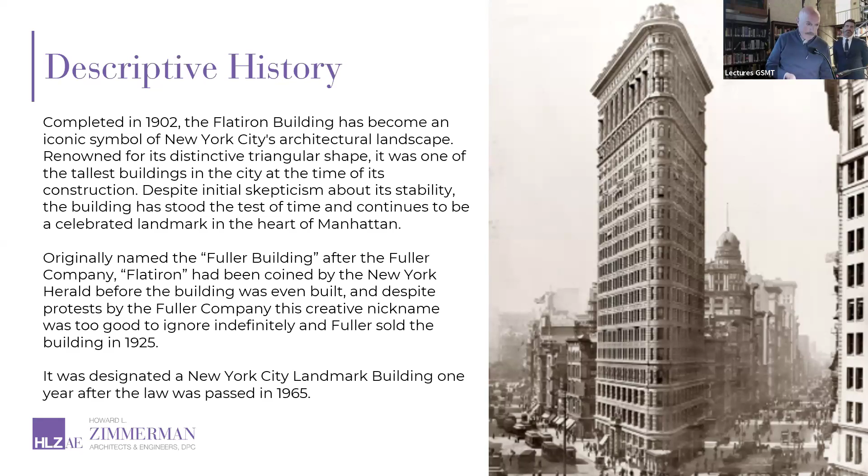The address is 175 Fifth Avenue. It stands between 22nd and 23rd Street. The architect was Daniel Burnham.

Daniel Burnham was a New York architect who designed the Flatiron Building, and then for whatever reason moved to Chicago and became more renowned for the Chicago school style of architecture.

The building has 21 stories plus a penthouse, and there are 467 total linear feet of street facades on all sides.

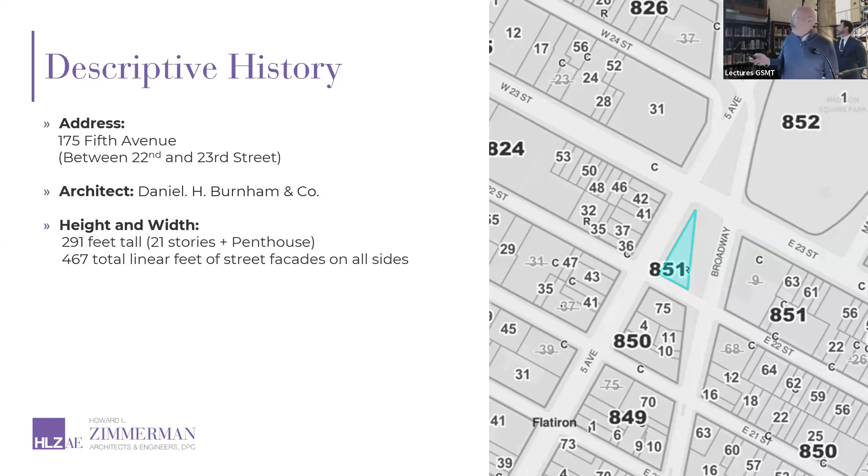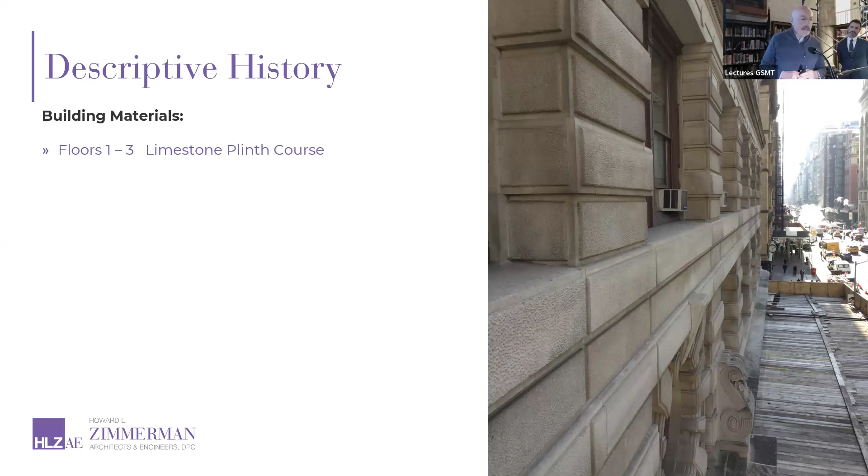So there are lots of building materials in the building. The first 3 floors are limestone plinth courses.

Whoops, sorry, I keep mixing up the advance and the pointer, so I apologize.

So the first 3 floors are limestone plinth. Floors 4 through 16 have terracotta ornamentation.

You just see all this marvelous terracotta around here. There's brick, terracotta, plinths and lintels, all stonework, decorative stonework that Alexei will get into in a few slides.

Floors 4 through 16 are terracotta ornamentation in the form of window lintel sills, jambs, plus spandrel medallions, keystone water tables, plus brick masonry.

I don't think the brick really reads when you see it. It mostly looks like a stone building, but there is a tremendous amount of brick on the building.

Just a magnificent building. There's a vantage point that you don't really get to see up close, and we'll have more slides, but the ornamentation and the detail and the arches are really spectacular.

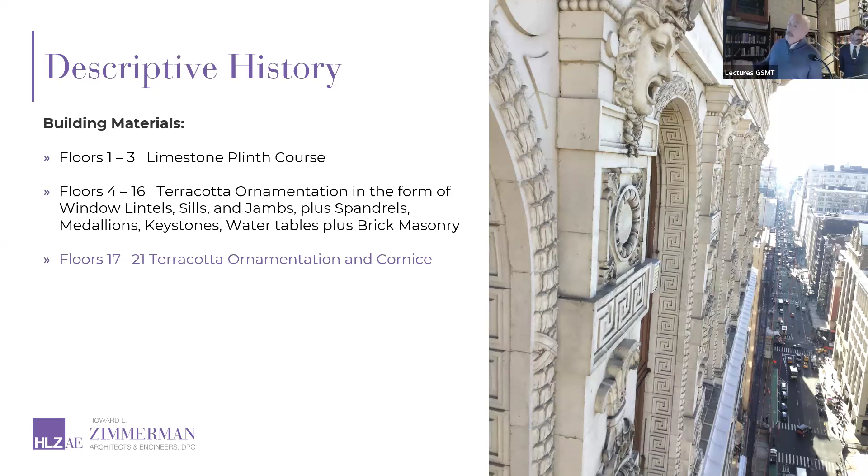On floors 17 through 21, there's terracotta ornamentation and cornice.

Most of you know, but terracotta, which I'll explain later—all of you who have gone to camp or arts and crafts classes and made a clay pot, that's basically terracotta, except this has a glaze on it. It is a very fragile material.

It was cheap at the time to recreate ornamentation, which was very popular back in the day.

As a building material, I don't know how to say this delicately, it should only have a life cycle of about 20, 30, 40 years in a freeze-thaw environment.

Not that it's going to fail or should fail—it is in failure. Architects and engineers have to prove to the building department that it's not in failure to keep it. Otherwise, it has to be replaced.

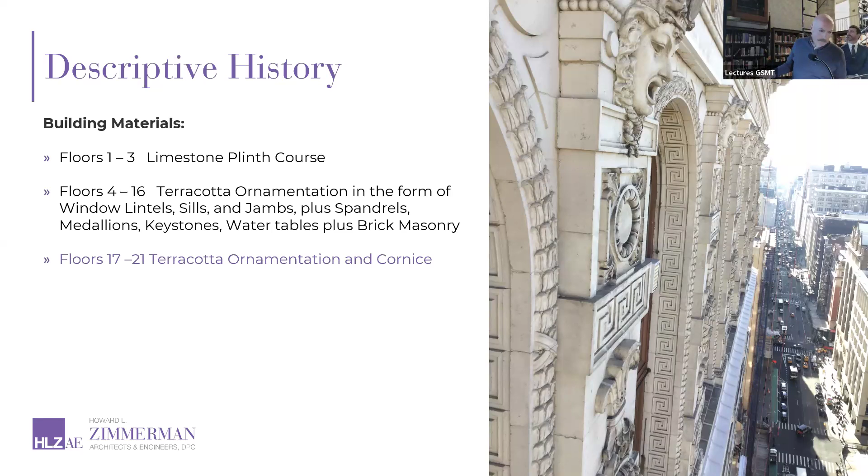So this is a beautiful photograph that you don't get to see. We actually went to the roof of a building across the street to see this.

Again here on the first floors are the limestone plinths, then you have floors 4 through 16 with terracotta ornamentation.

17 through this area here is terracotta ornamentation and a cornice. On floor 22, there's GFRC and brick pier balustrades and a stucco penthouse, and aluminum frame double hung windows throughout.

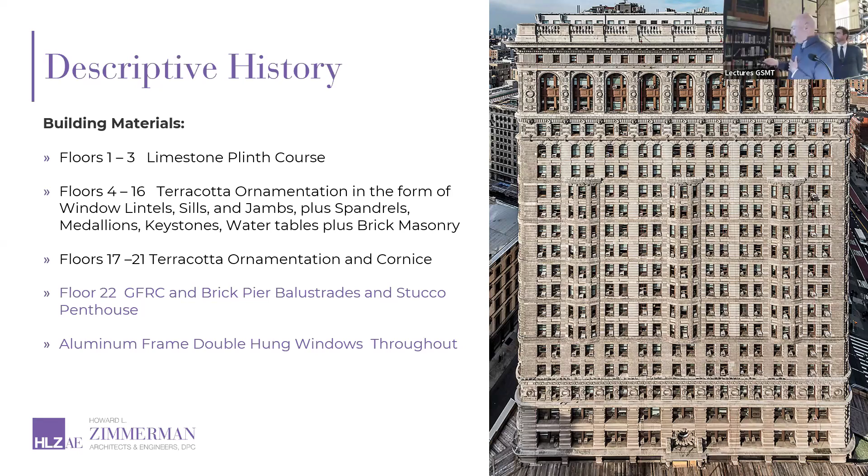We dug this up, and when I first saw it, I thought we were back in Europe or something, but Alexei told me this did exist for a brief time. The Landmark Preservation Commission finds that the Flatiron Building was designated a landmark in 1966.

Also, I wanted to mention, although it's iconic and very New York and international, there was Edward Steichen's photograph in 1918 or 19.

He photographed it for the New Yorkers from Madison Square Park, looking that way through the trees.

I think it was raining or snowing, and it was colorized, but this was 1909 or 1919. And it gave the Flatiron Building a global iconic audience at that time.

So the Landmark Preservation Commission in 1966 found that the Flatiron Building had a special character, special historic and aesthetic interest and value as part of the development, heritage, and cultural characteristics of New York City.

The Commission further found that among the important qualities, the Flatiron Building is an interesting example of the early steel-framed skyscraper built on an unusual triangular site that, due to the prow-like effect of its northern end, creates an impression of great slenderness and height, that it displays a wealth of ornamentation detail representative of its time, and that although a utilitarian office building, it has inspired literary outpourings of an almost poetic quality.

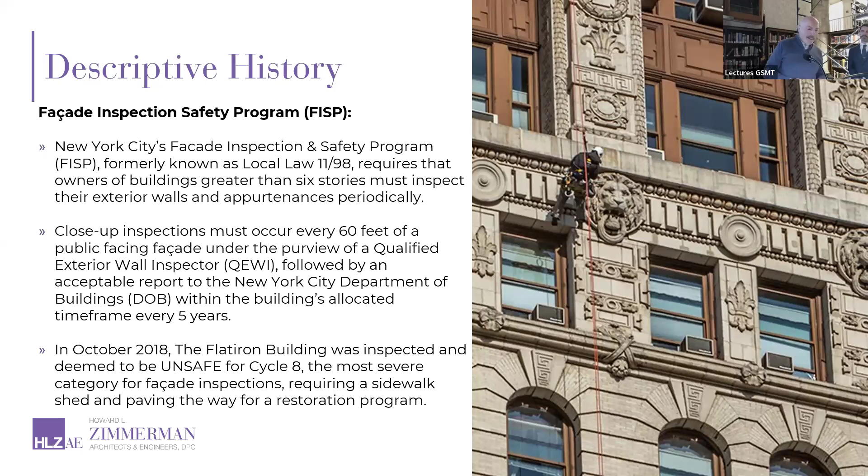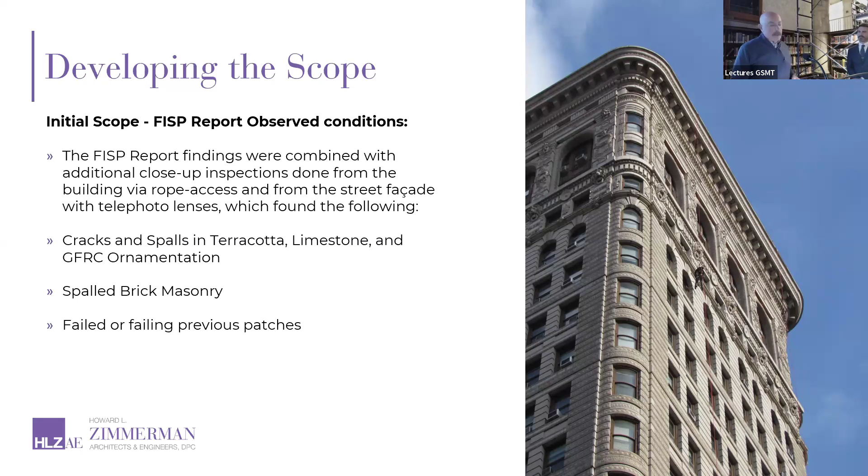So now that we had all this information from rappelling down and putting together a scope of work, it was quite an undertaking. The FISP report findings were combined with additional close-up inspections done from the building via rope access and from street level with a telephoto lens, which found cracks and spalls in terracotta, limestone, and GFRC ornamentation, spalled brick masonry, and failed or failing previous patchwork done in previous cycles, which we will show you all of that.

Understanding the material is always very important, knowing your patient is very important. Borrowed from Italian terra, meaning earth, and cotta, meaning baked, terracotta was utilized for construction by ancient Greeks, Egyptians, Romans, Chinese in the Indus Valley, and Native American cultures. Modern usage for facade cladding came into fashion in the late 19th century as a reaction to the 1871 Chicago fire, which spurred great interest in fireproofing materials.

From 1870 to the 1930s, prominent architects, including Daniel Burnham, appreciated the characteristics of terracotta as it was lightweight, moldable, mass-produced, and had the ability to mimic costlier natural stone details from hand-carved limestone, marble, or granite.

So the understanding is, back in the old day, they used to use wood for ornamentation. That got replaced when metal tools and the ability to carve stone came into effect. Stone was used, but that became more costly over time, and they came up with the idea of using terracotta as a cheaper way of recreating beautiful details in a more cost-effective manner. Although they say it's lightweight, if you try to lift one of these things, it's not so light.

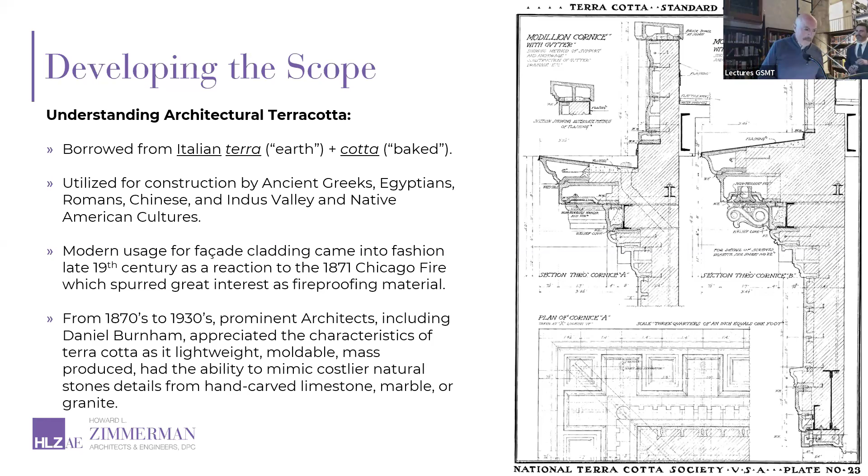Understanding the material is very important in our business. Terracotta itself is typically not the actual cause of the problem. You could leave terracotta by itself for years and it'll be perfectly okay. As with any material, once you introduce another material to help, support, anchor, or complement it, two dissimilar materials always create problems. Steel was used as a means of holding it together and supporting it, and it rots and rusts and puts stress and strain on adjacent materials.

Instead, the iron or steel support structure hidden behind and within the units has deteriorated due to decades of water infiltration from masonry joints and deferred maintenance. As iron or steel rusts, the members concurrently expand and weaken, causing a variety of pressure and loads on the softer terracotta immediately adjacent. Steel has a phenomenal ability.

When steel rusts, it expands, like slate does also, and in its expansion it exerts tremendous pressure that is more powerful than the ability of the stone material to withstand, and that's what causes the failure. The steel is actually pushing on the stone, and it just overcomes it. That phenomenon is called rust jacking.

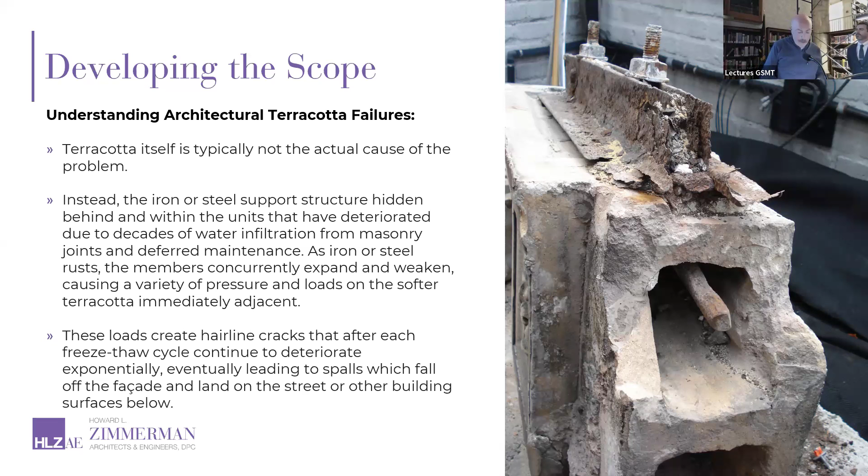So classic deterioration here, you have cracks - hairline cracks. The idea is that this triangular piece will eventually dislodge and slide off this ledge, as these will, and those are deemed hazardous conditions. Here are previous patches or sealants that have given way and are in failure.

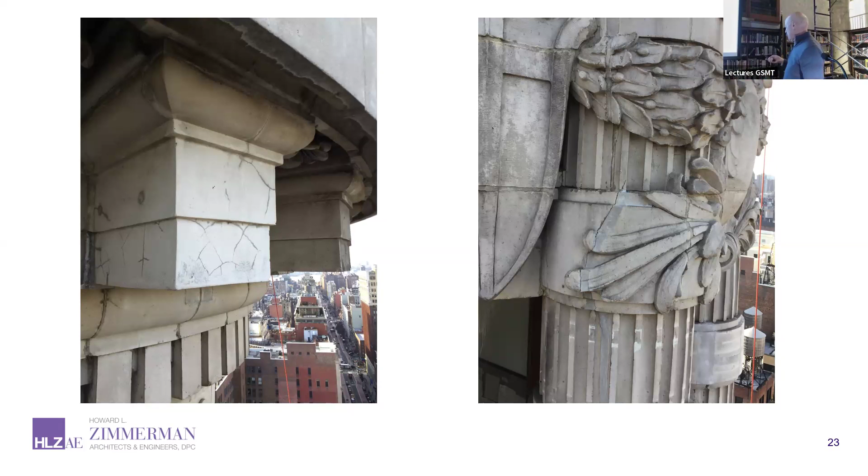See all this crack - all of these are conduits for water to come in and penetrate slightly one year, penetrate further the next year, and over the course of 5 or 10 years it really gets in, penetrates the surface into the steel below. Here are previous patches that are failing. These are previous patches that are failing.

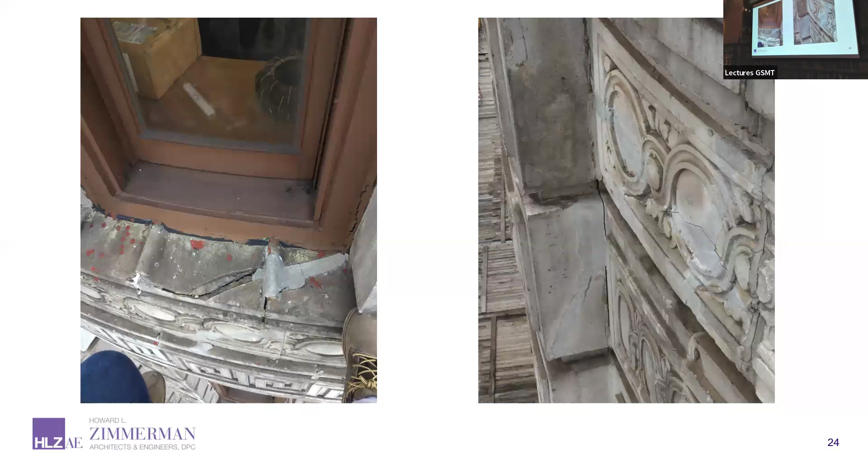So, you know, these are really unsafe conditions. I don't think you need to be an architect or an engineer to figure out that this thing one day is just going to fall off in a freeze-thaw cycle.

Here's what happens: water penetrates through these mortar joints, which are porous. Even if the brick is glazed or more waterproof than not, the mortar joints are porous and serve as a conduit for moisture to get in. The moisture gets in, freeze-thaw, it freezes, expands, and pops the surfaces of the brickwork.

That's why the popular white glazed brick of the late 50s, early 60s - I always say some dumb architect thought about the idea of self-cleaning buildings, but I don't know if that's a true story. Anyway, they came up with this glazed brick, which looked pretty and held its cleanliness a long time. But again, water got behind the glaze after 20 or 30 years, weakened everything, freezes, and the glaze pops off, and all of a sudden you're getting shards of white glaze surface falling to the ground which can be very injurious. We have seen many setbacks and backyards where the entire backyard is covered in these shards, and thank God it's not on the street.

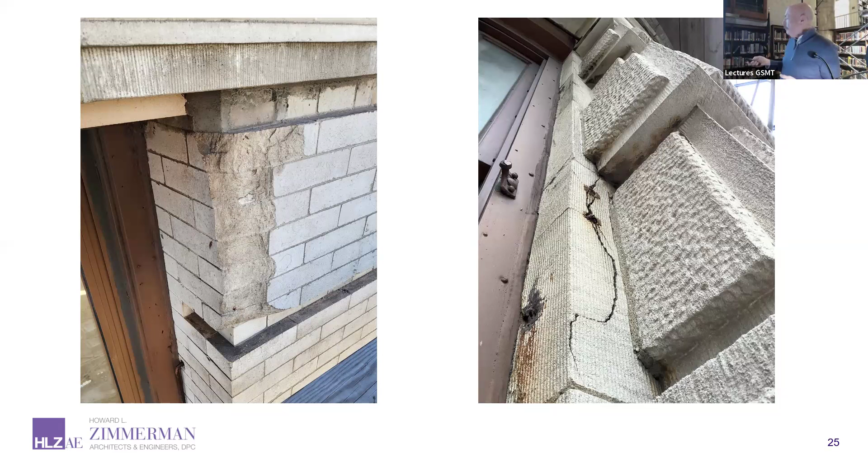So here you could see, again, previous patchwork, cracks. Again, the idea from the building department is that this triangular piece, one day when it just loses all its adhesion, will fall off and slide down and become a projectile.

This is a previous patch. I don't know what they were thinking or what they did, but my grandson in arts and crafts does a better job than that.

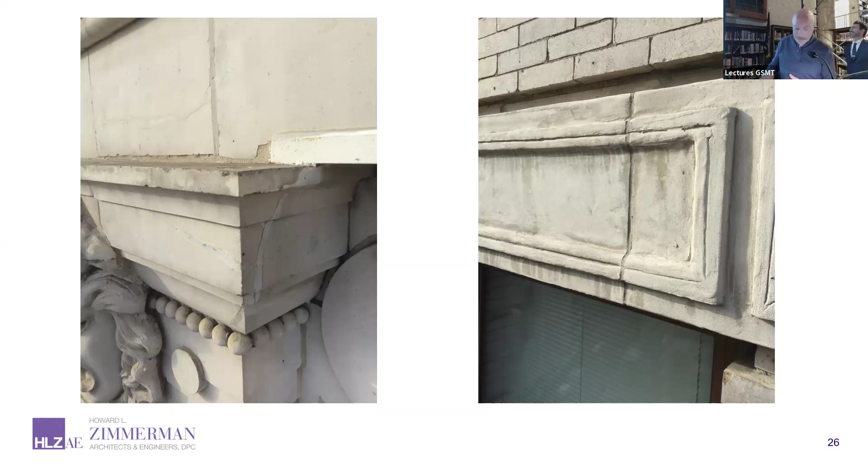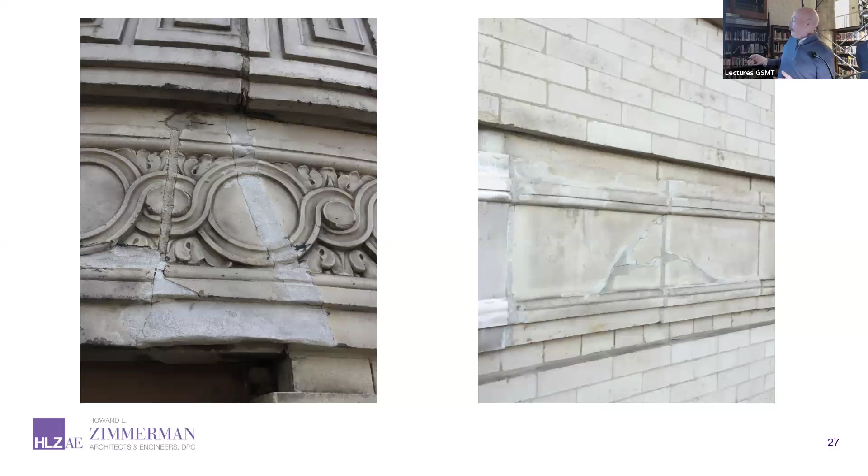This is to show you how frail this joint was caulked. This is a caulking joint that theoretically is to hold out the water, but I guess it was put too late in because water had already penetrated, and this piece is going to fall off. Forgot whose foot this is, but here are previous patches, and you can see the openness when you think about water penetrating and causing damage.

All of these joints, and there are hundreds of thousands of linear feet of joints, are all open conduits to any building, let alone a historic and fragile building, to allow water to get in to deteriorate the anchorage and the steel.

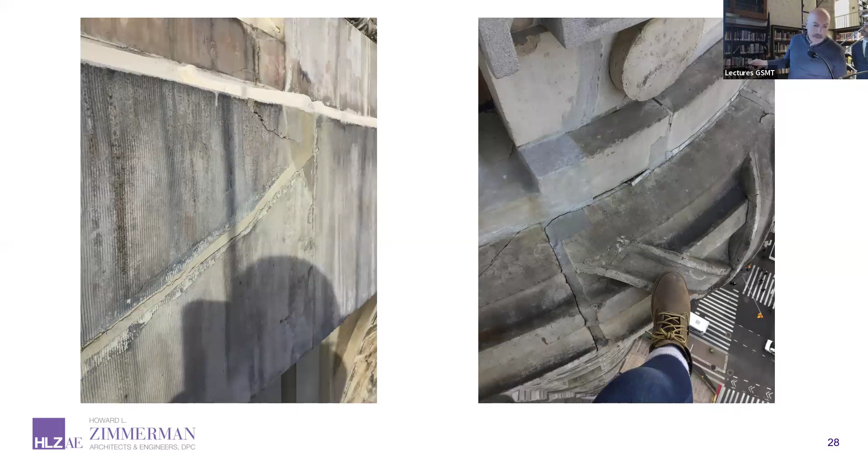So after we diagnosed all the conditions that I just showed you, did probes, construction documents had to be created. We did the inspections, completed them in 2019. Work then began on the construction documents, setting forth the details and requirements for the project, including specifications and construction drawings that established the quality level of materials.

Quantitatively, qualitatively, and systems required for the project. There were 134 pages, including 50 line items in the bid breakdown, no scope for windows or storefronts. As a sidebar, we produced 134 pages. A couple of months ago I had the wonderful opportunity to go to the TWA Hotel at JFK, and they have an exhibit there. That whole building, they say in the display, was done in 60 drawings, no AutoCAD, no computers, and we have 134 drawings here.

Upon completion of the CDs, the project was filed with LPC and DOB and competitively bid out in the spring of 2019, ultimately being awarded to AWR Group. Here is a sample of some of, this is just a minuscule snapshot of one of many, many drawings that were necessary to figure out all these details, how things go together. It's really a jigsaw puzzle that had to be deconstructed and figured out, and Alexei Tajzler was the person who figured it out.

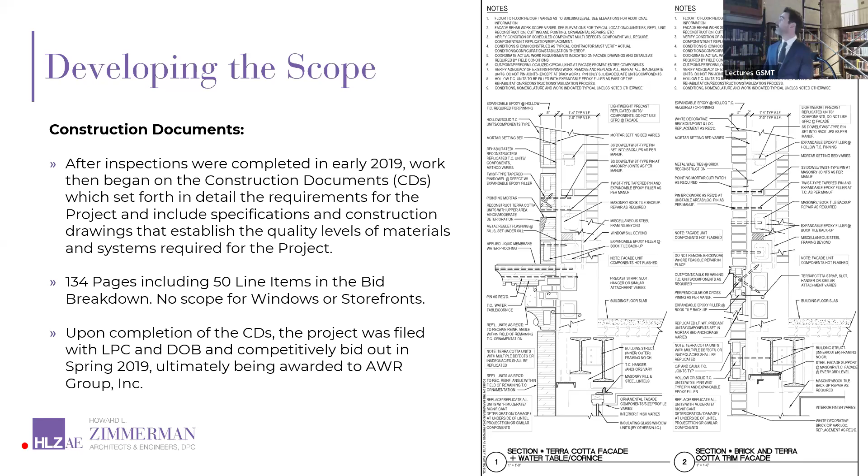Hello, everybody, and thank you to the General Society for inviting us here today. My name is Alexei Tajzler. I am an architect, I'm a director. I worked for Howard for over 15 years. And while the Flatiron Building is not the oldest structure I've had the great privilege to help restore, it's certainly the most famous. So we can get on to implementing the scope and mobilization.

So we had the CDs, we had the bids, the permits, AWR was ready to go. What does that entail exactly? So first thing was the installation of a full height pipe scaffolding plus additional suspended scaffolding. You can see a great photograph of the pipe scaffolding, not unlike what we're sitting underneath right now. We then divided the building into a grid of individually focused areas, which I'll get to in the next slide. There was coordination of 15 employees at HLZAE across all levels and specialties, including architectural, structural, and special inspections.

With the pipe scaffolding and the suspended scaffolding, we now could fully inspect the entire facade up close. So we found further areas that weren't visible from the rope access or from the street inspections. And then we developed a field office on site with AWR Group and Gladding, McBean, who is a terracotta vendor.

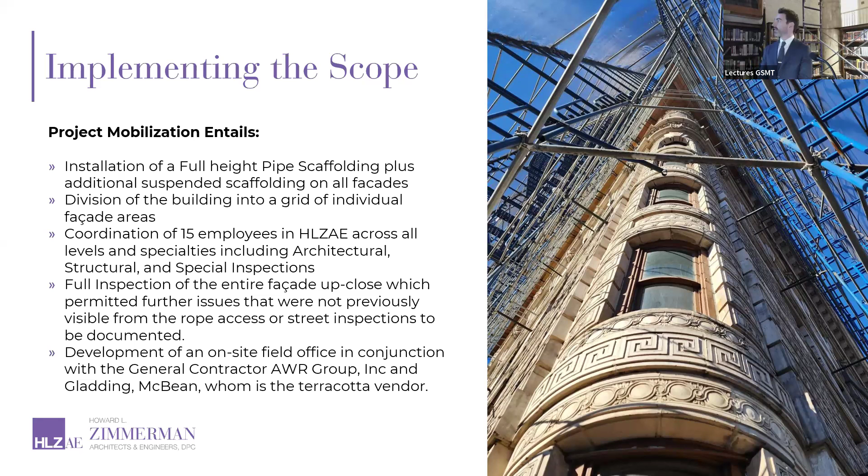So the grid. We took each facade and overlaid a grid of 400 individual areas, about 12 by 30 feet. What that allowed us to do was walk the building and then individually focus on those spots, tag them with work categories that were geo-tracked, work categories such as crack repair, unit replacement, et cetera. All told, we're looking at 7,155 tags to be called out, which included nearly 2,000 ceramic terracotta units to be replaced.

20,000 linear feet of masonry joints to be repointed. As Howard mentioned, that is the conduit to get water into the backup, and 1,000 linear feet of crack repair. You can see here, all the grid, we have about 22 rows and 6 or 1 column, depending on the facade.

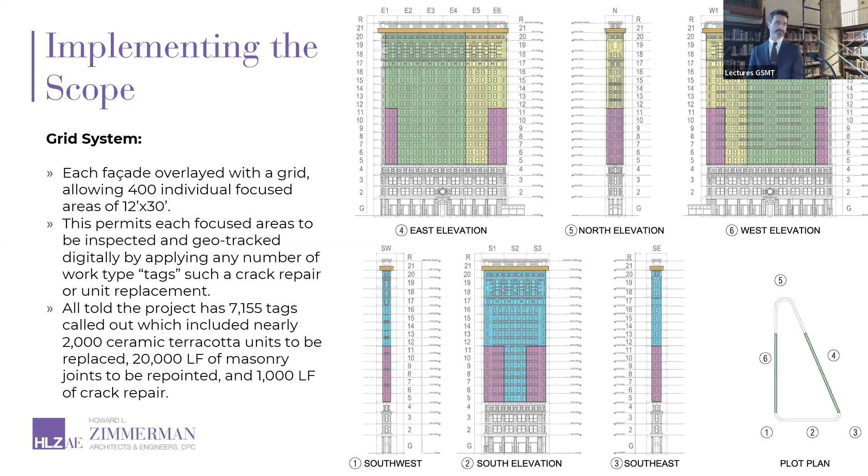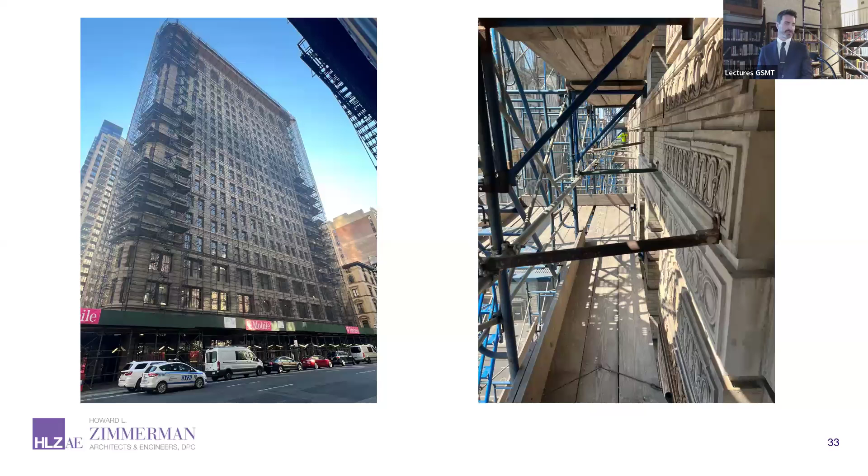And then on other facades, we used suspended scaffolding. In the industry, we call these drops. On the right is Rob. I took that photograph actually right as I was calling him to make sure that he didn't send me straight to voicemail. And for the record, he did answer it, so great job, Rob. He's here in the audience.

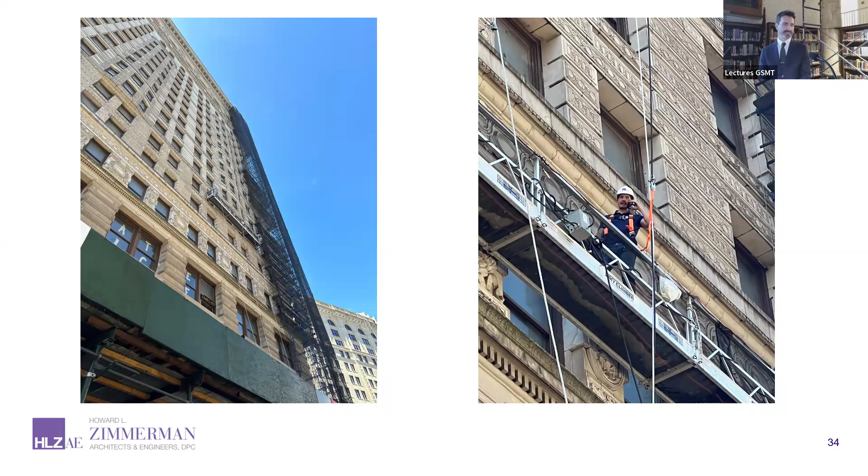So as we're on the building, we have the ability to sound using a hammer. It's a rubber mallet hammer. It allows us to hit stones that we are concerned about. We register what sound we hear back, and also sometimes the stones shift on us when we hit them.

With a hammer, that usually indicates there is much further damage beyond the superficial cracks we can see. On the right is a very large probe that allows us to take a look at the backup, at the steel reinforcement. Even for a building like the Flatiron, we usually don't have the original drawings. Even if you have the original drawings, it's been 120 years since the building was built. They've done previous repairs before.

We don't have those drawings either. So a lot of times we're figuring out things on the fly. So here's me kind of staring and really questioning what I'm looking at.

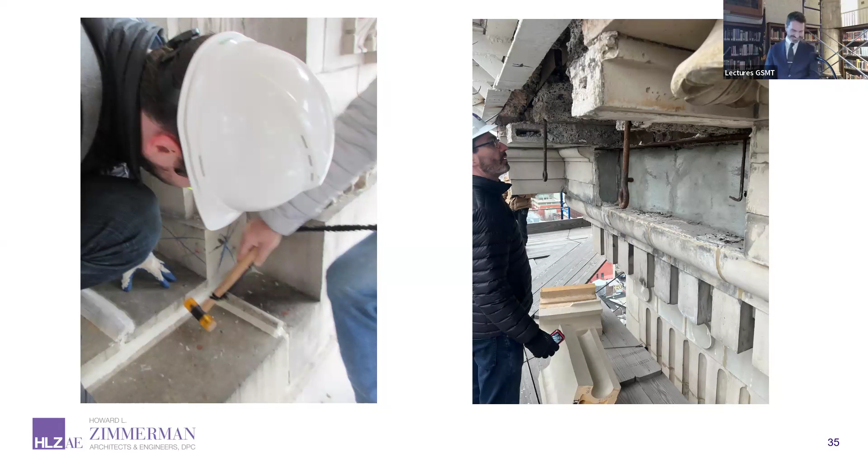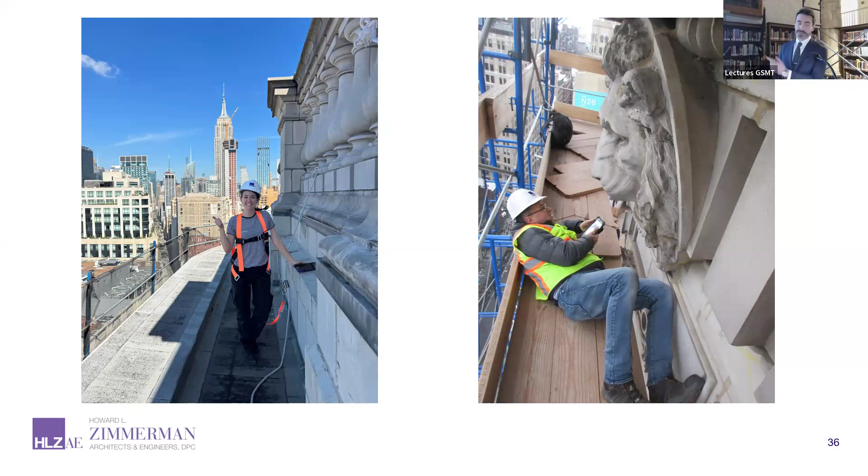That lion's head in particular had to come out, so we have it sitting in our field office there on the right. But I like to talk about how do you replace terracotta in New York City.

So in a typical facade restoration for historic buildings, existing terracotta can be replaced with replacement materials. Those are most commonly architectural precast, glass fiber reinforced concrete (GFRC), or fiberglass. This is in part, as Howard mentioned, because there are only 2 vendors left domestically that have the trade skill and knowledge to replicate historic terracotta. It used to be 30 or 40 back in the 1930s. Those 2 are Boston Valley in New York and Gladding McBean in California.

So despite the fact that the Flatiron Building does have ornamentation above the 6th floor, LPC required that all terracotta be replaced in kind, given the special architectural and historic character of the building.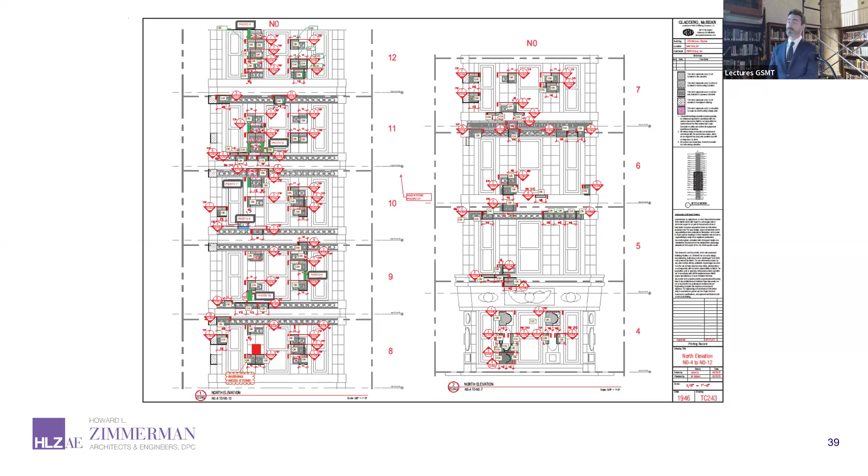Now, this is done as much as AWR would have loved to just quickly get this over with and take a jackhammer to this - they can't. We need these stones. They have to come out as carefully as possible because we need to be able to mimic and measure and look at all aspects of the ornamentation and the depth of the stone, the web on the inside, the backup, etc.

So the stones are carefully taken out bit by bit. And also in any terracotta building, while they do have steel and iron straps, the stones also support themselves, both up and down with dead loads and also side to side with lateral loads. So they have to be shored with 2x4s. In addition, we're taking out the major protection for water infiltration by taking out the stone. So now we have to waterproof the backup, which is shown in green with the peel and stick.

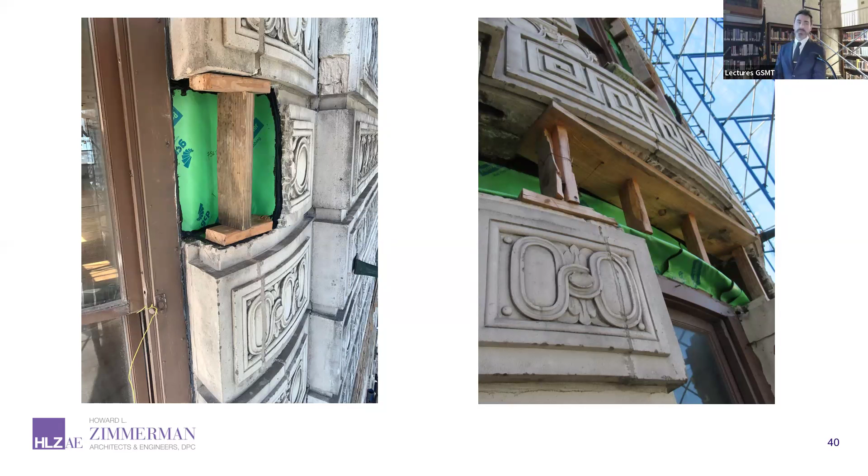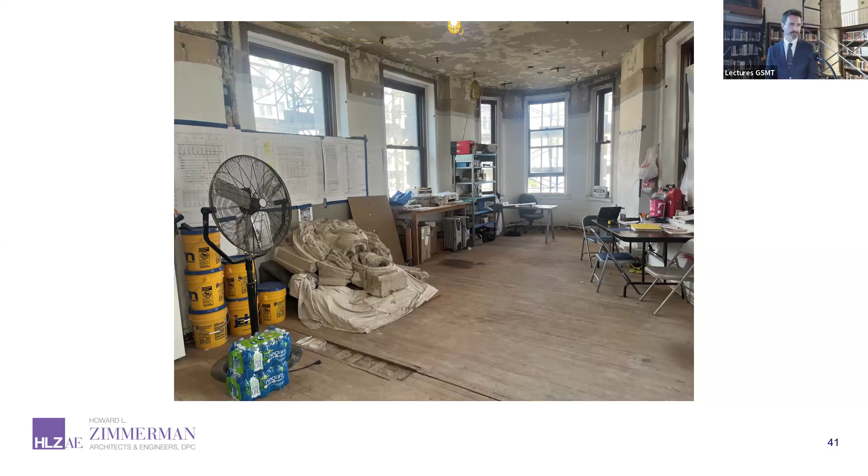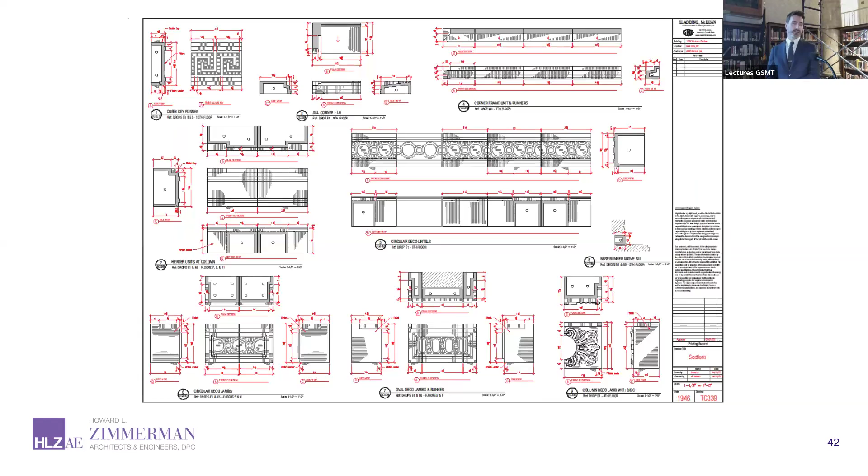And then here are some of the shop drawings, and you can just see the vast extent of ornamentation of all the different shapes and sizes. We have some stones that are more generic. We have stones that are curved. We have stones that project out. We have all types of stones - radial column stones, cantilevering stones, et cetera, et cetera.

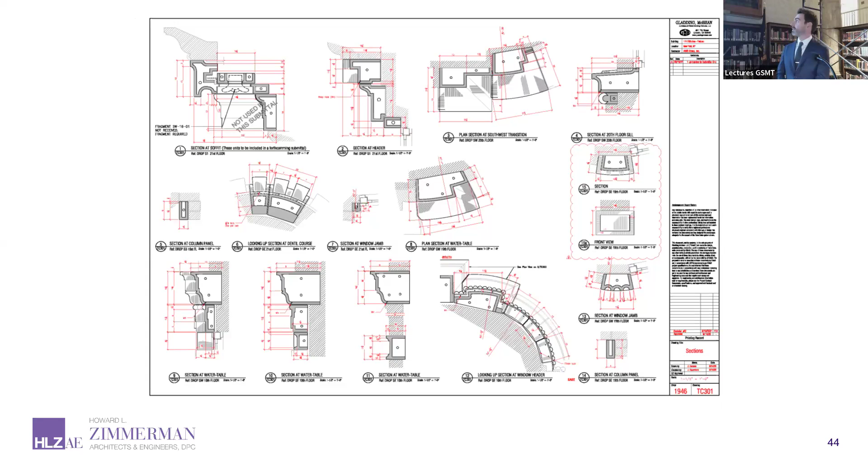More simple, generic stones can be mechanically extruded through a die or a mold, but regardless of whether it's pressed or extruded, it's dried with hot air. It's then glazed and placed into a kiln for burning. The temperature is slowly raised between 500 and 900 degrees Celsius and can take up to 2 weeks. The cured units follow a very strict QA and QC process, including meeting ASTM specifications and standards.

And the key point: due to industry backlogs, high demand, and short supply, the process can take 8 to 18 months to receive a single stone from when it was first called out for replacement. This is an issue that every building in New York City is facing, and is partly the reason why you start to see more replacement materials like precast, which have far shorter lead times.

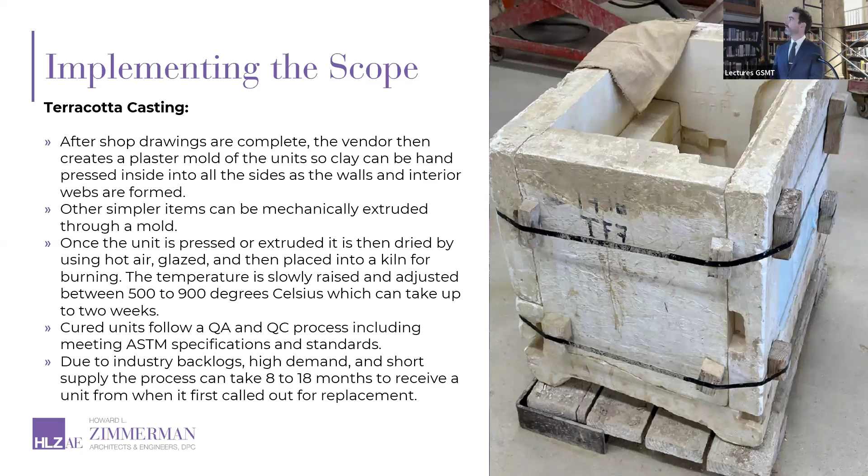So while that's going on, we're still working. We have to figure out how the stone is going back in. We're not going to use the old iron straps that have rusted out. We have to come up with new technology.

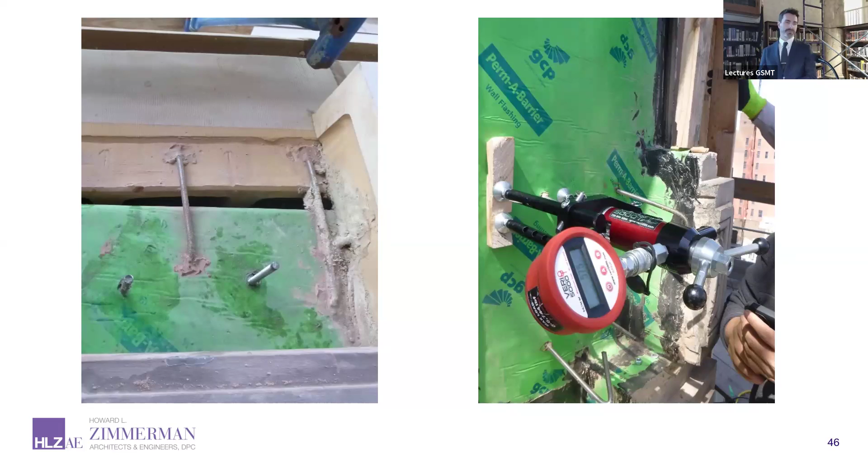We're also working with the color. We have to match 120-year-old stone. It's quite difficult, we have to do as best as we can to get the texture right. So we're working again with the vendor, matching it in shade, direct light, indirect light, etc.

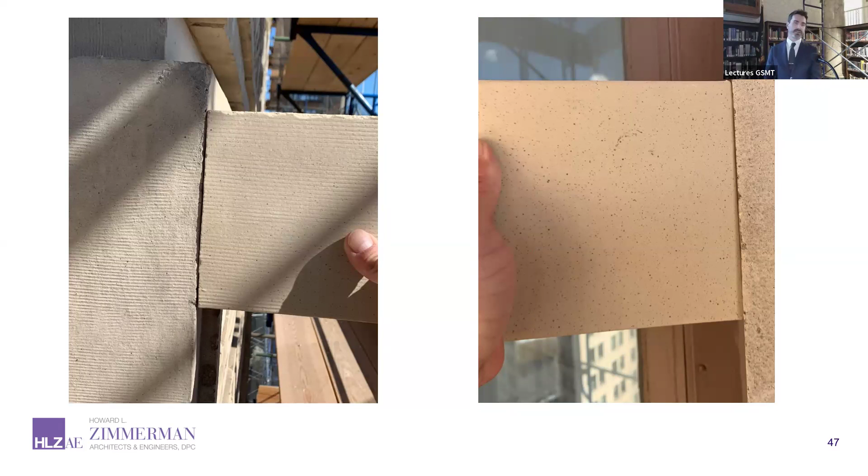Once all these 2,000 stones start coming in, where do they go? Well, thankfully, the Flatiron Building has been vacant since 2019, so we have plenty of floors to store them. We don't have to worry about having them outside and getting damaged. You can see they're all individually marked, tagged, and they sit and wait to be put back in.

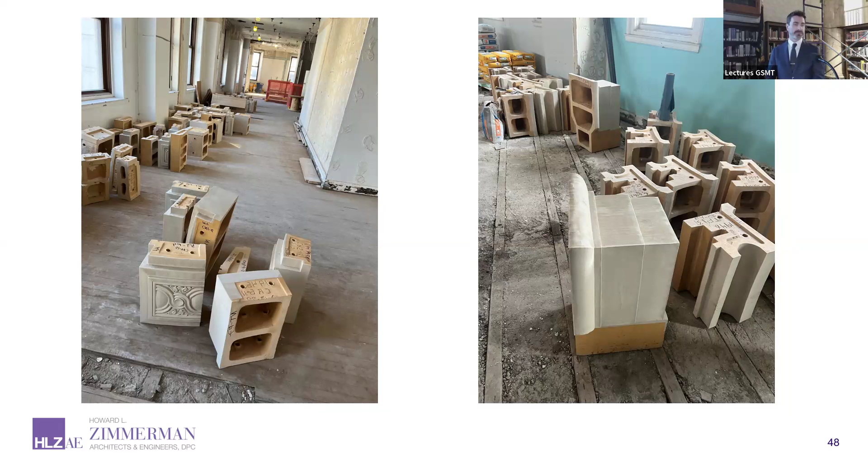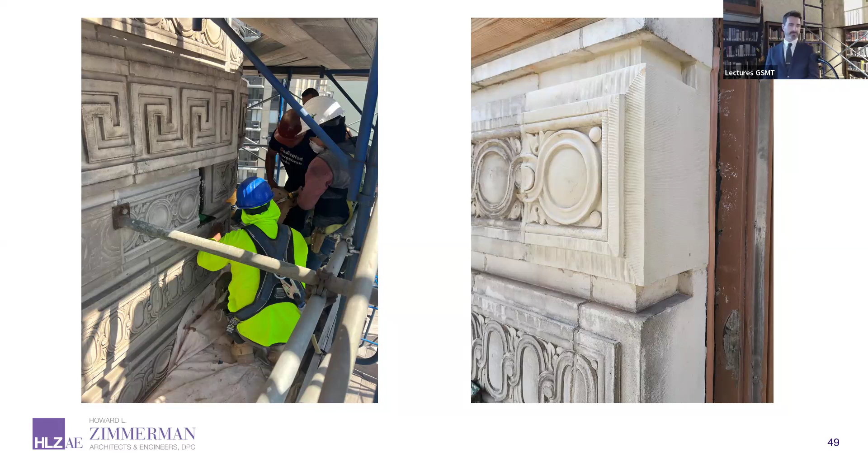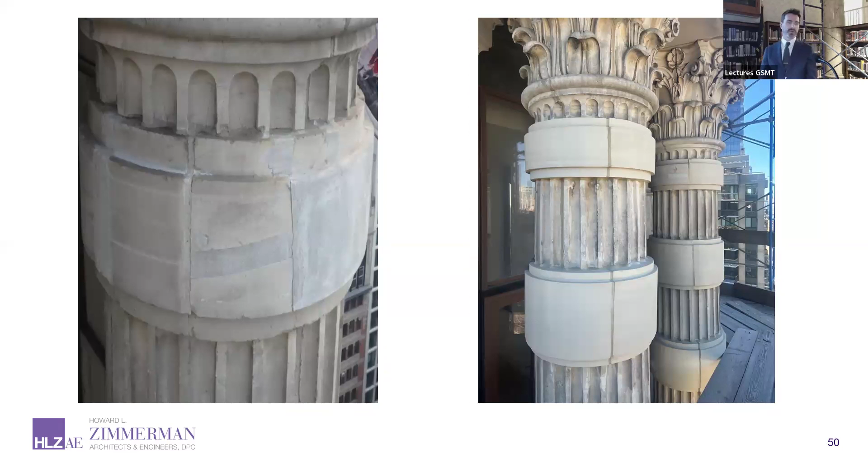Here's some examples of some other replacements. This is a collar unit at one of the columns. You can see it's been patched before, and we opted to just do a full replacement of several of those stones.

Another one here has some ornamentation. You can see the cracks at the upper right and left, there and there. And we went back with a new piece, and you can see how much ornamentation and detail we had to match with each and every stone.

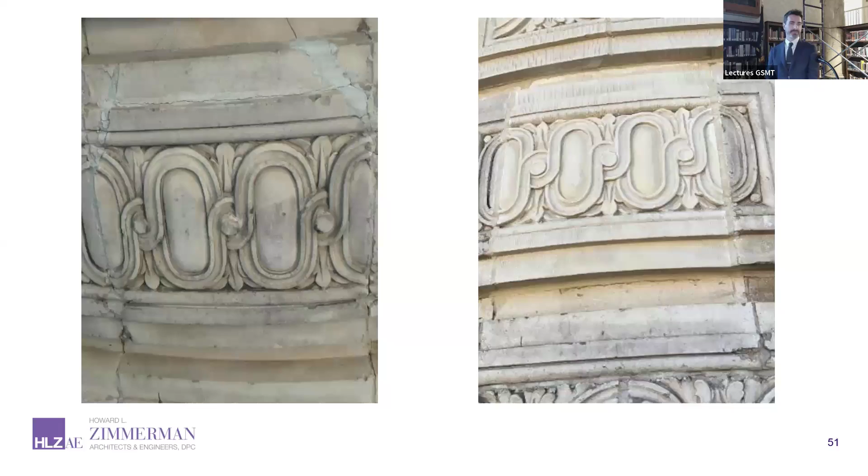At some water tables, we've got some concave and some convex details as well.

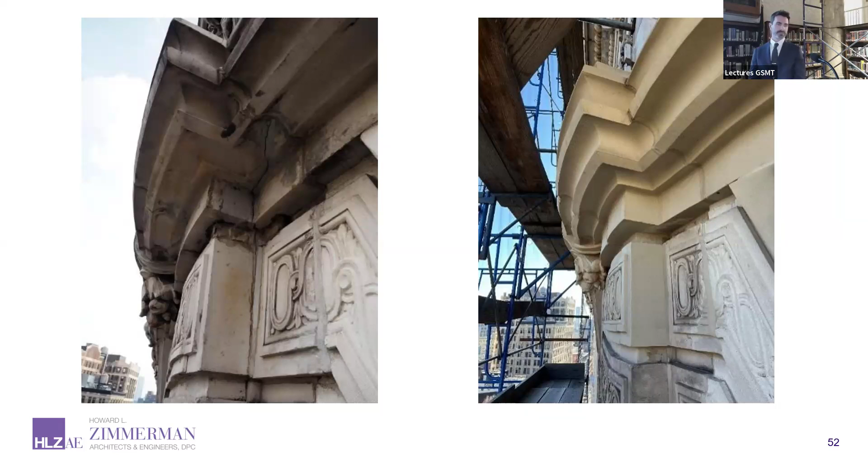And then the ornamentation just keeps on coming. We've got some medallions, we have some rope bands, we have a lot of things that I've had to go to my old architectural books to find the terminology for. It's really a beautiful, beautiful building.

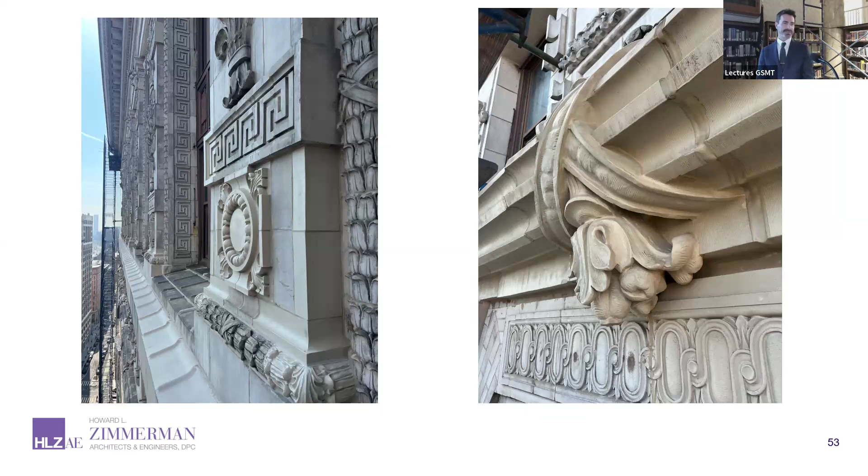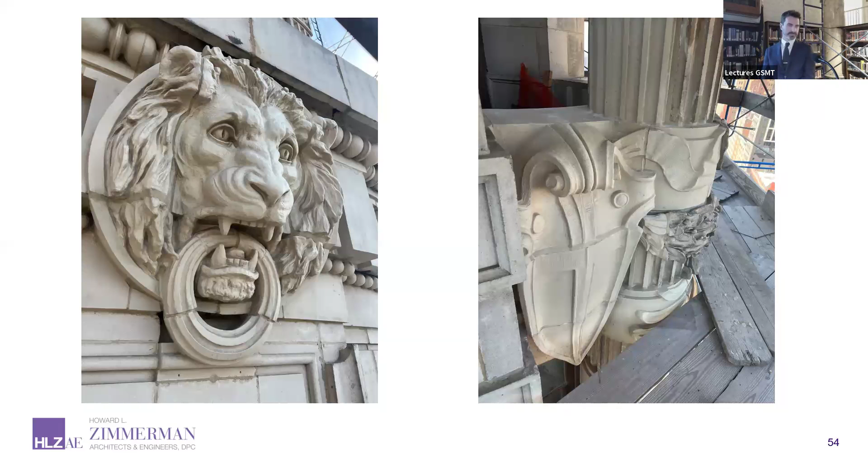So as I mentioned, it's at the top of the building. This cornice in particular is over 2,500 stones of nine different molds, from the coping stone at the very top to the dentils at the bottom. All told, it's 6 feet tall, 467 feet wide, and cantilevers 4 feet away from the building, about 275 feet in the sky.

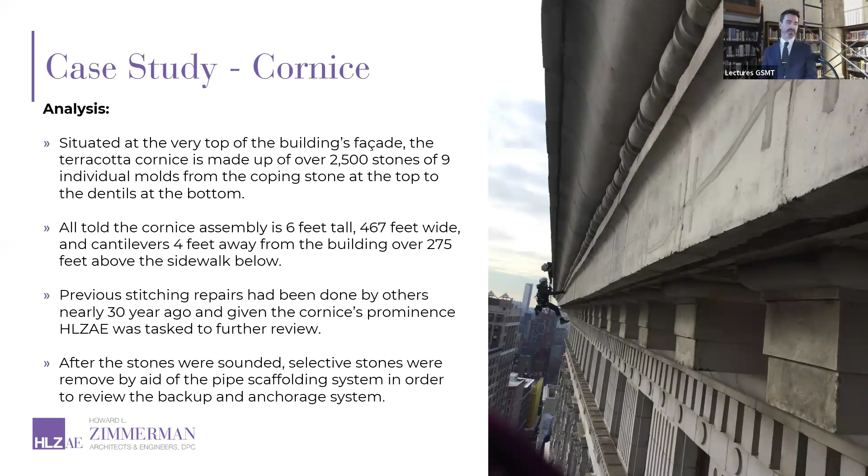Stitching repairs: they repair the horizontal with mortar, and then they add additional threaded rods vertically, just like a stitch. In a human wound, this is a building wound. They are great, they are common, but they are only as good and as deep as you cut.

And in this situation, the crack continues past the repair and runs its way all the way to the back. This is what we call a full depth crack, and it's quite honestly the worst thing you could find on

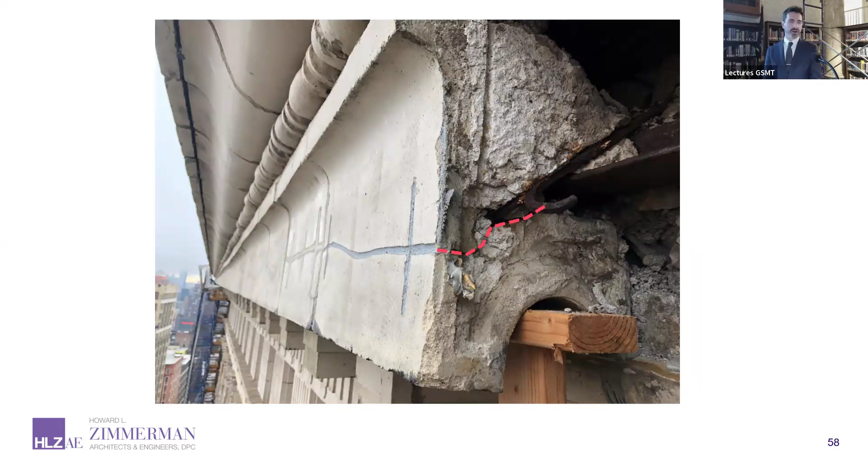a terracotta building. It's highlighted here in red. The reason this is a problem for this particular stone is that this stone is held into place by the steel strap here in the circle, the steel angle with the backwards L.

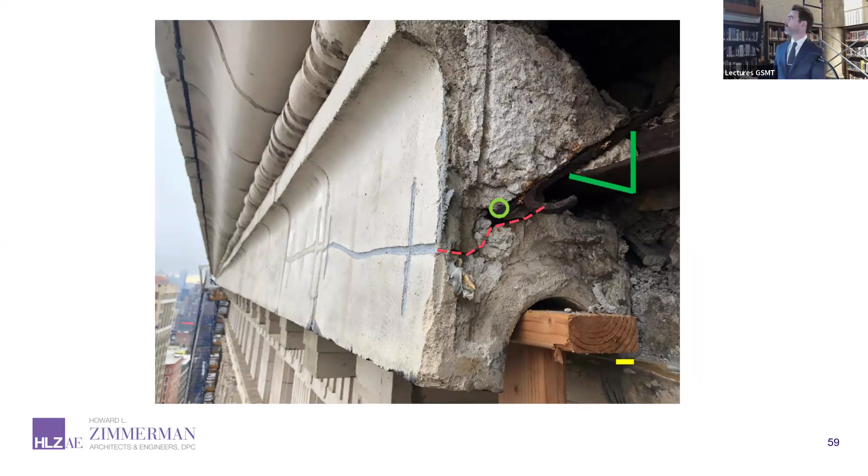This crack completely bypasses both of those two elements of structural reinforcement. So in effect, we have a stone on this side sitting only on this tiny ledge here in yellow and being held in place by the other two stones on either side. So we're effectively relying on friction, which is not something we want to depend on for a building of this size.

Clearly, given the height, clearly given the age, and again, it was previously repaired 30 years ago, the decision was made to replace all 268 of these stones on every facade.

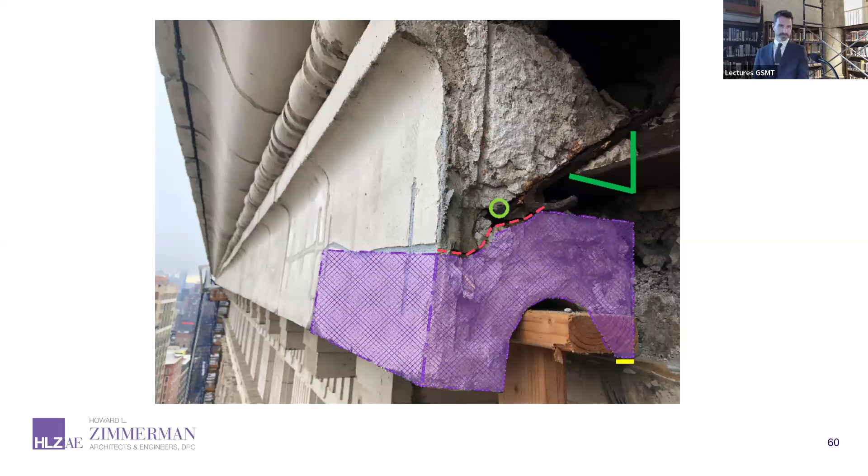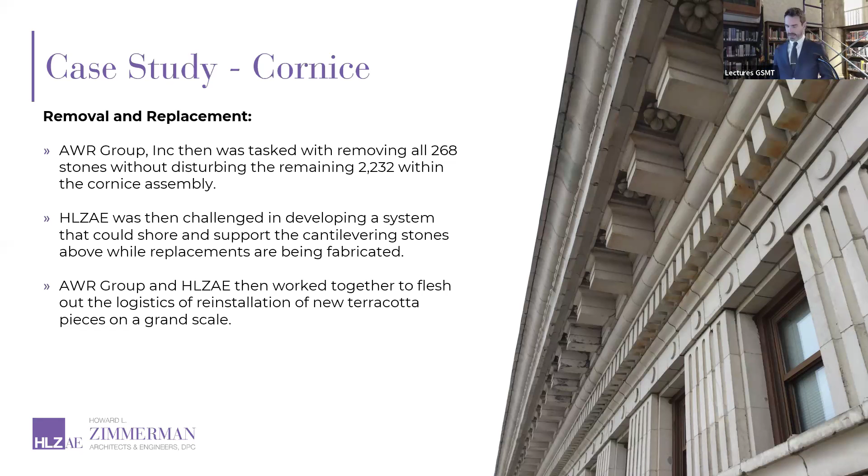So how is that done? Again, AWR was given the very fun task of removing those stones, but not disturbing the other 2,232 within this cornice assembly. We were then challenged with developing a system that could shore and support the stones above as these stones came out. And then the two of us had to work together to figure out how do we put the new stones back in.

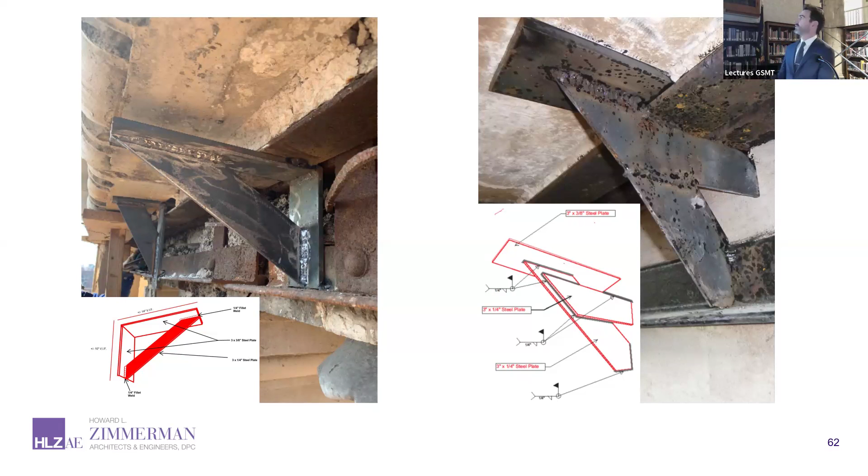And we went with this design, which is a series of 1/4 inch and 3/8 inch thick steel plates that are welded to the steel system behind. And so the men of AWR had to go stone by stone: shore, take out a stone, shore, take out a stone, shore, scrape, prime, and paint the steel system, and work their way down all the facades.

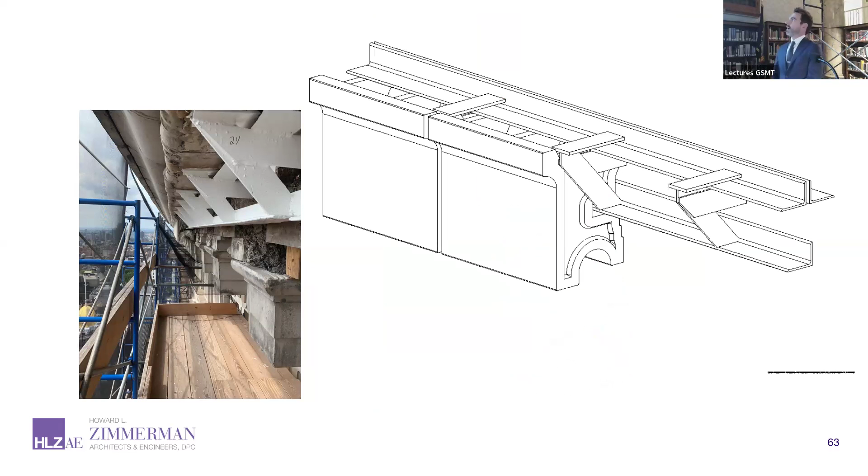Now that we have that figured out, how do we put the stones back in, right? That's the next challenge. So one option we discussed was, well, we just spent all this client's time and money on coming up with a steel shoring system. Maybe we can repurpose that for the hanging of the stones.

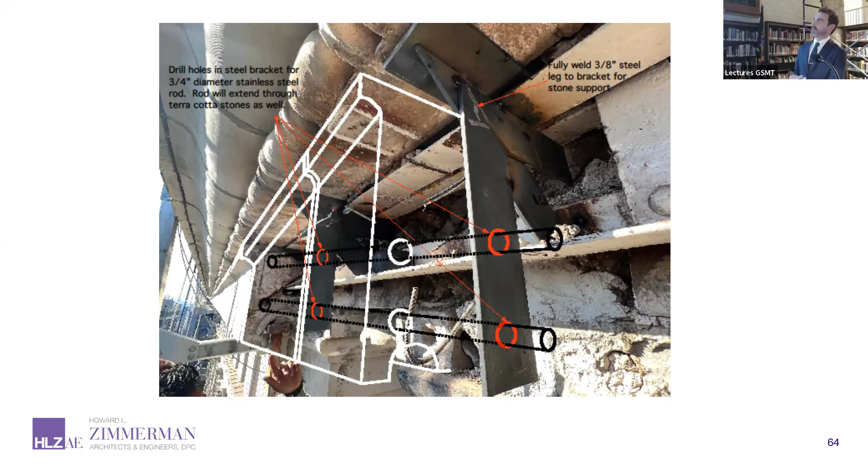And so the idea was to drop a new vertical plate, run long threaded rods between each stone, and that would pick up the loads necessary to suspend the stones. We got one or two of them in the field to work, and then we started running into problems. The first and somewhat obvious one is, what do you do at the curve, right?

These buildings don't have facades that meet at a point, it's a radial curve. A long threaded rod is not going to curve. Even if the building was entirely straight, all of these stones are slightly different when they come back. They're not exact. Not only that, the opening is not dead level.

No building in New York City is dead level, dead straight. So we need to have the ability for the workers to work with slight discrepancies stone to stone. And again, a very long threaded rod does not give them that option.

And then lastly, while this plate was great in terms of supporting the stones, it's actually too thick. The original design of the joint did not have a plate here, so it was a certain width, and this plate just doesn't fit. So we had to go back to the drawing board again.

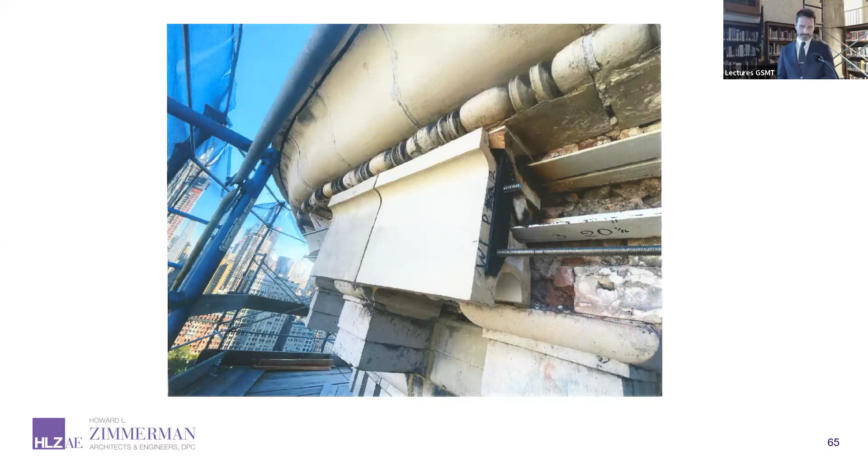We then decided, why don't we utilize that steel angle system in the back and run some new threaded rods that are welded, that come down, create a hook, and then we have small 8-inch wide threaded rods for each stone. That allows a lot more tolerance for the workers, and they can go stone by stone by stone.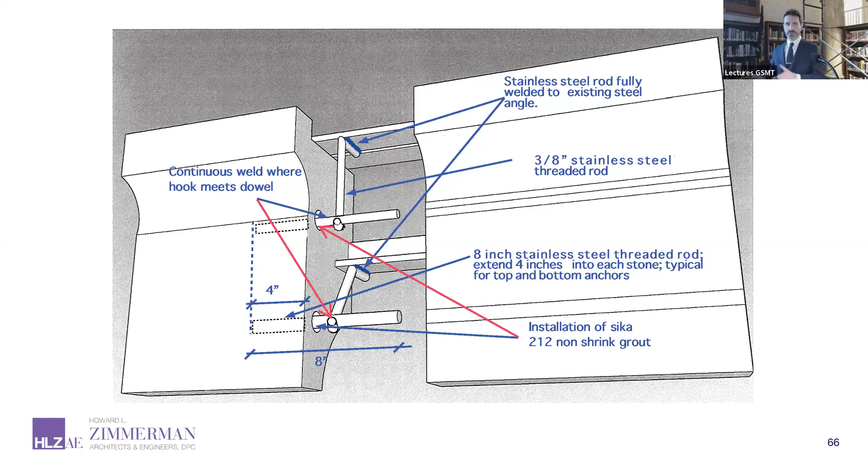Here is a mock-up of it, and we got it to work. You can see the angle system and the threaded rod coming down, hooking, grabbing onto this threaded rod, which sits in non-shrink grout, and then it's caulked to stop water from getting in. And that was great. We're all happy about it.

Then we ran into the issue of the workers. You can see this is very labor intensive—there are 4 men working on one stone. It's very heavy and above eye level, and the men cannot put the stones dead straight back in. They need to be able to come in at an angle so they can run these bars in.

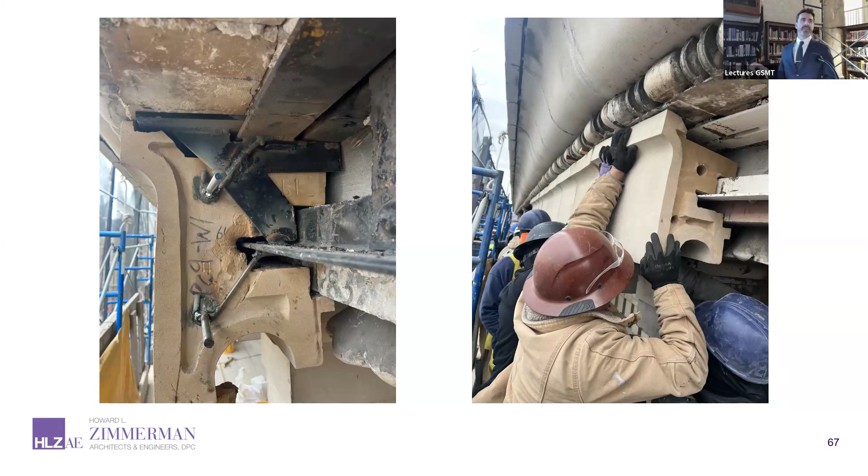Unfortunately, our coveted steel support system is now in the way. So we had to go back to the drawing board once more, because while we could take it out and put it back in, we now only have access to one side. That means half the welds, and half the strength. That was not acceptable, so we did another design.

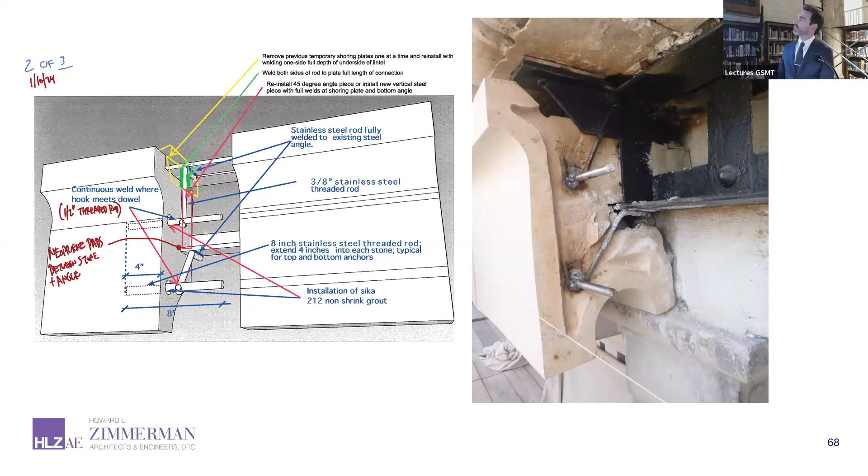So now we no longer have the 45, we have a vertical piece. This allows a lot more points of access for welding, and that is the final stone anchor detail, which was figured out in November of last year.

As of today, we have about 50 of these stones in. They are going in along 5th Avenue. We'll then move on to 22nd Street and then finish up on Broadway.

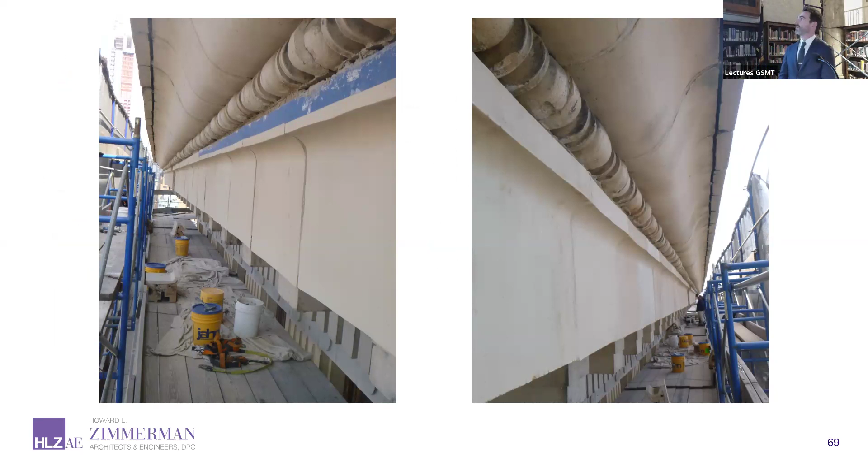Still have a few issues though. Going back, what do we do with these curves? Not only do we have all these stones coming out, but we also have other stones in the cornice assembly—we call these planter boxes, but these are very large projecting stones held in by an eye bolt and rod system. How do we put those back in, and how do we fix the curves? The answer to that is, I will get back to you, because I do not know the answer. This is an ongoing project, but we'll eventually figure it out.

So thank you to everybody, and I appreciate you coming out.